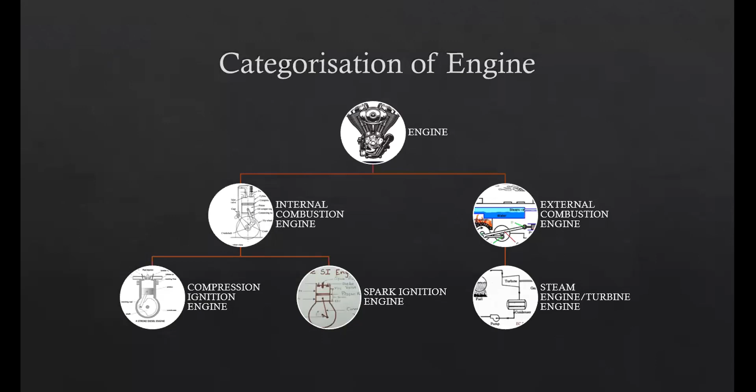Now again you can ask a question - why different fuel, different engine? Can't the same engine run on both fuels? So let us see what is the difference between a CI and SI engine.

The first difference is in a CI engine, no spark plug is available, whereas in an SI engine, spark plug is available. Now see, the name is compression ignition - compression is compressing of the air fuel that is inside, and ignition means in a CI engine the ignition takes place by the compression of the air fuel. So here spark plug is not there.

Whereas in an SI engine, where the name only says spark ignition, that's why a spark plug is available. So that is the major difference between CI and SI - spark plug is there in SI, no spark plug in CI. Second is high compression ratio and low compression ratio.

Now see, in a CI engine the ignition will take place only due to compression. There is no fire that we are putting - only due to compression the ignition will take place. So what happens is we have to increase the compression ratio so that the pressure created on the fuel will be enough. So we have to increase the pressure.

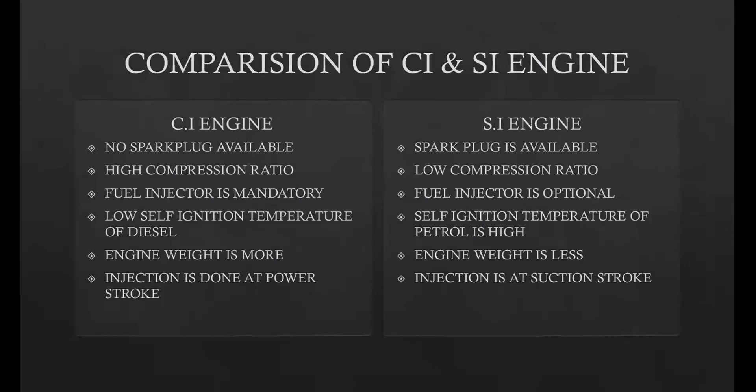So now you are aware why a CI engine is not used in a motorcycle and why a SI engine is used, and what is the difference between a CI engine and SI engine. Now let's take it forward. Here you can see the working of both the engines. To your right, you will see the working of the SI engine, and to your left, the working of the CI engine.

If you observe the CI engine, you will see that at the power stroke, that is after the compression, the diesel is being injected into the cylinder. And if you observe the SI engine, the air fuel mixture enters at suction, and at the power stroke, the spark plug sparks. So that is the difference between the working of your SI and CI engine.

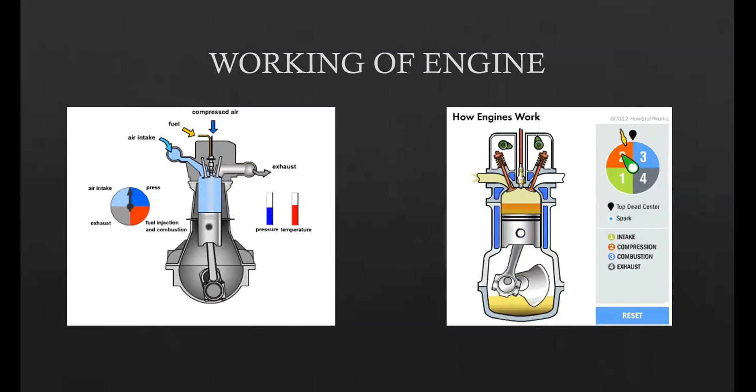Now let us talk about this: SI and CI engines are divided into two types, that is 2-stroke and 4-stroke. Before knowing two-stroke and four-stroke, let us understand what is a stroke.

See, this is a cylinder, and let's assume this is the piston. Now this point of the cylinder is called TDC, that is top dead center. And this point of the cylinder is called BDC, that is bottom dead center. Now understand, a movement of the piston from TDC to BDC is called a stroke. So one movement from TDC to BDC, or from BDC to TDC, will be called one stroke.

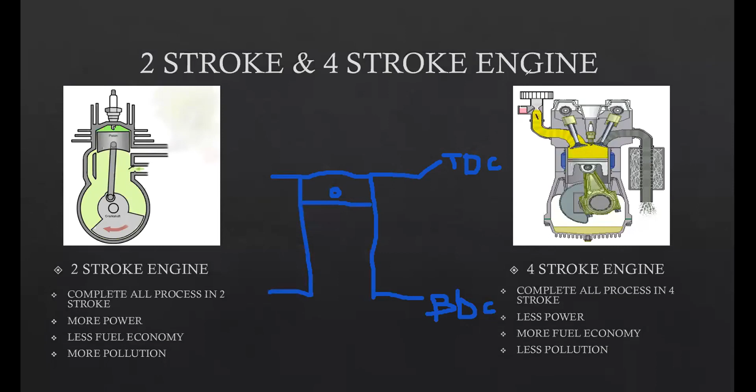So there are four strokes in four processes, that is called a four-stroke engine. Two strokes in four processes is called a two-stroke engine. So that is the difference between a two-stroke engine and a four-stroke engine. The processes, which are suction, compression, power, and exhaust, happen in four strokes of the piston in a four-stroke engine, and the same processes happen in two strokes in a two-stroke engine.

So now let us see more differences between a two-stroke and four-stroke. First, complete all processes in two-stroke versus complete all processes in four-stroke. Second is more power, so let us understand. In a two-stroke engine, the four processes are completed in two strokes of the piston, that is from TDC to BDC, again from BDC to TDC.

So four processes are completed, and in this process the crankshaft rotates 360 degrees. So in a two-stroke engine, the crankshaft rotates 360 degrees. Whereas in a four-stroke engine, for completion of all four processes, the crankshaft rotates twice. So in a four-stroke engine, there is a power stroke at every two rotations of the crankshaft. In a two-stroke engine, there is a power stroke at every single rotation of the crankshaft.

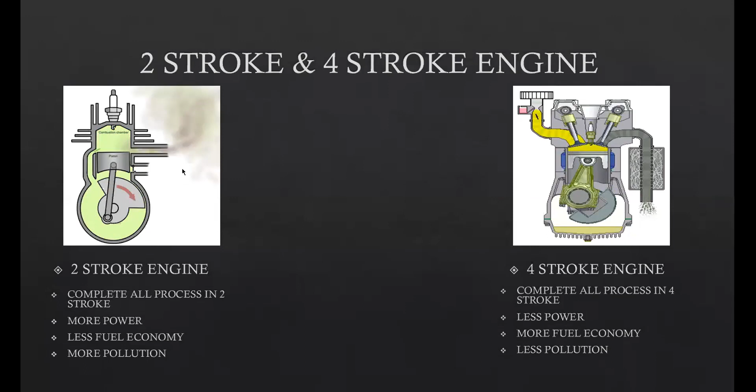Now see this video, it will explain more about two-stroke and four-stroke engines.

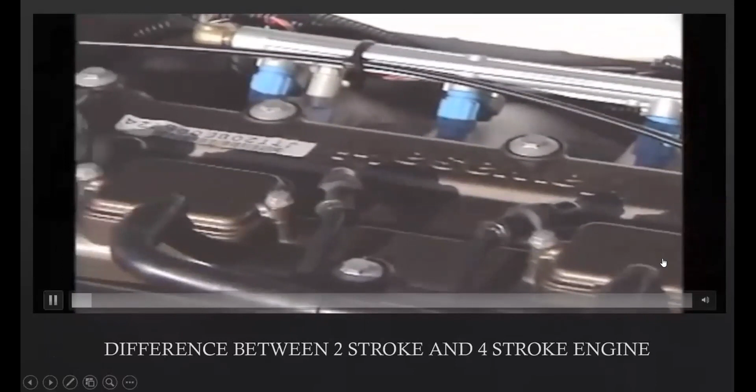There are two types of engines available in PWCs: two-stroke and four-stroke. These names are derived from the number of strokes the piston takes to complete a cycle. For example, a four-stroke engine takes four piston movements to complete its engine cycle.

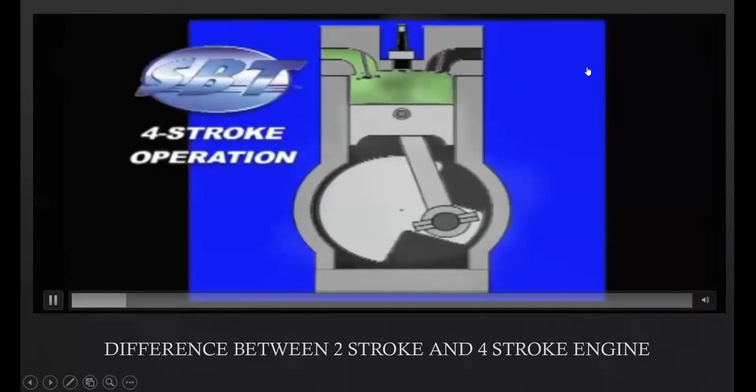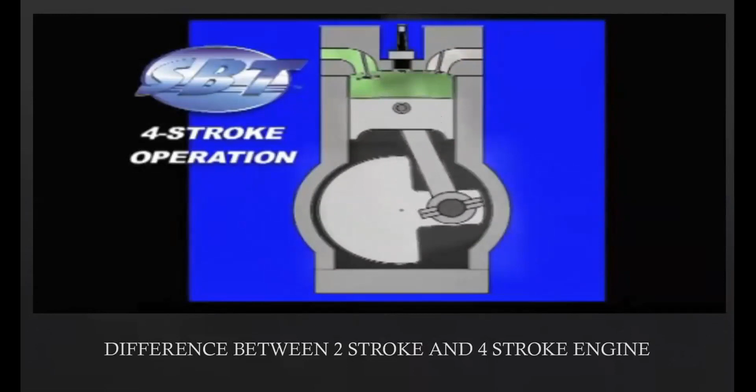The piston lowers for the intake stroke, drawing in the air and fuel mixture, and raises for the compression stroke. The air-fuel mixture is ignited for the power stroke, forcing the piston down, and finally raises for the exhaust stroke, forcing exhaust out of the engine. The cycle then repeats over and over, turning the crankshaft, which is connected to the impeller, which drives the craft forward.

A two-stroke engine is designed to accomplish its complete cycle in just two strokes. During its power stroke, the ignited air-fuel charge forces the piston down until it reaches an opening on the side of the cylinder called the exhaust port. As the piston continues down, it pressurizes the air and fuel mixture under the piston that was drawn into the crankcase during the previous compression stroke.

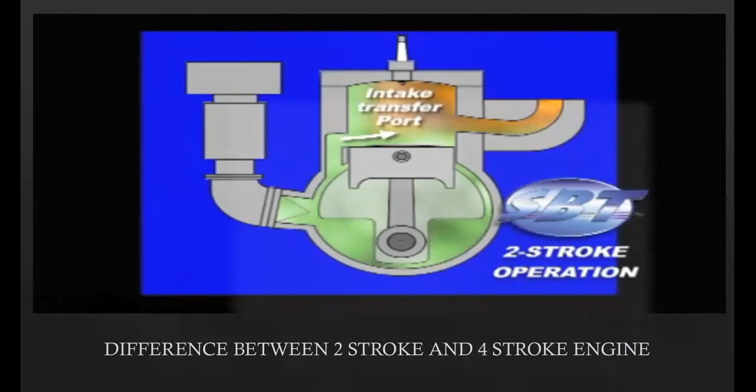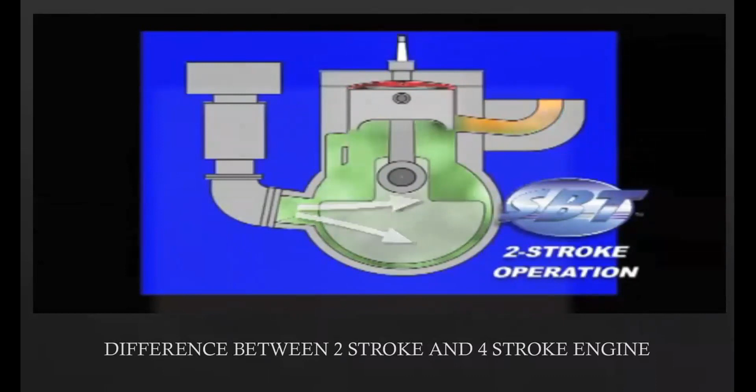An intake transfer port is exposed, allowing the pressurized air and fuel into the cylinder. Finally, as the crankshaft continues to turn, the piston rises, closing off the intake and exhaust ports and compressing the air-fuel charge inside the cylinder. The rising piston also sucks in the next air-fuel charge under it into the crankcase from the carburetors. The compressed charge is ignited by the spark plug, repeating the cycle.

The biggest advantages of two-stroke engines are lightweight design and simplicity in parts. The engine itself weighs significantly less than a four-stroke of equal power output, and there are anywhere from 30 to 50% fewer moving parts in a two-stroke engine compared to a four-stroke. It is also much easier to clear out a two-stroke engine that has been swamped with water.

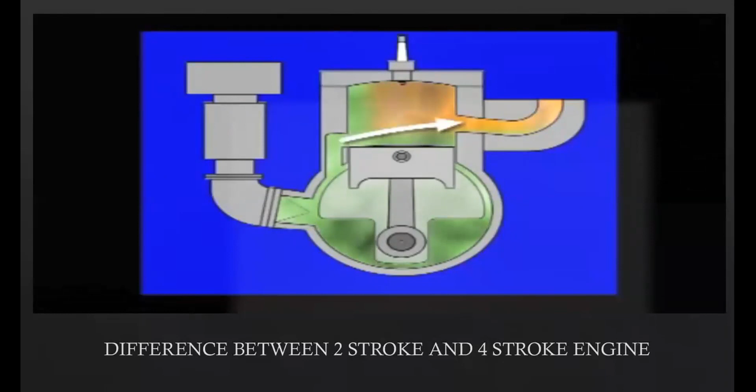The biggest disadvantages are increased fuel consumption and elevated hydrocarbon emissions from its exhaust compared to a four-stroke. Because a two-stroke has its intake and exhaust open at the same time, some of the fresh air-fuel charge passes through the cylinder and out the exhaust port without ever being burned. Because of this and other factors, two-stroke engines have higher unburned hydrocarbon output in their exhaust than comparable four-strokes.

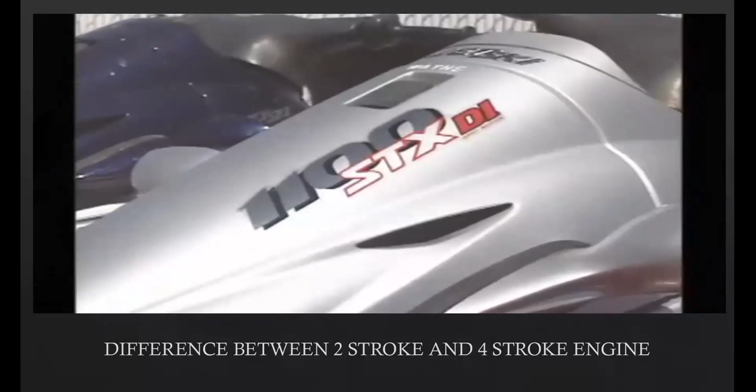There are significant exceptions to this, particularly with engines that use direct injection technology or catalytic converters to obtain low and even ultra-low emissions for their two-stroke watercraft. Late model PWCs in general are significantly cleaner burning and quieter than their predecessors.

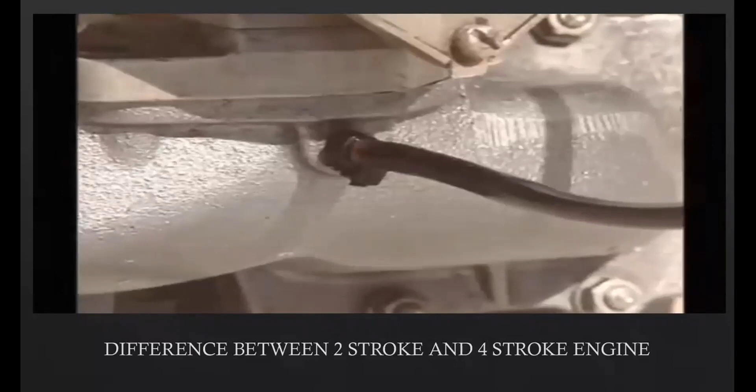The engine oil of a two-stroke engine can be administered by one of two methods. The first method is oil injection, where the oil is drawn from a separate oil reservoir and pumped into the intake tract of the engine in predetermined amounts.

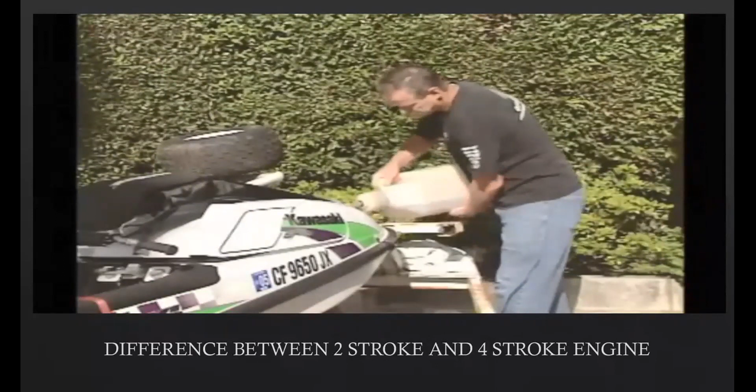The second method is by premix, which is to physically mix the oil into the gasoline before it's poured into the gas tank. The big plus for premix is that it is as reliable as you are, meaning that if you remember to put the oil in the gas in the proper ratio, it will make it into your engine.

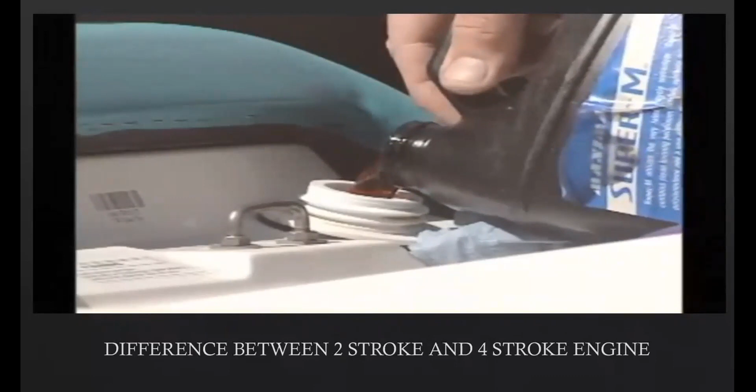The strong point for injection is convenience. Just keep your reservoir topped off with oil, and the system takes it from there. The downside is that oil injection pumps have been known to fail, and when they do, it's without warning, and the results are catastrophic for your engine.

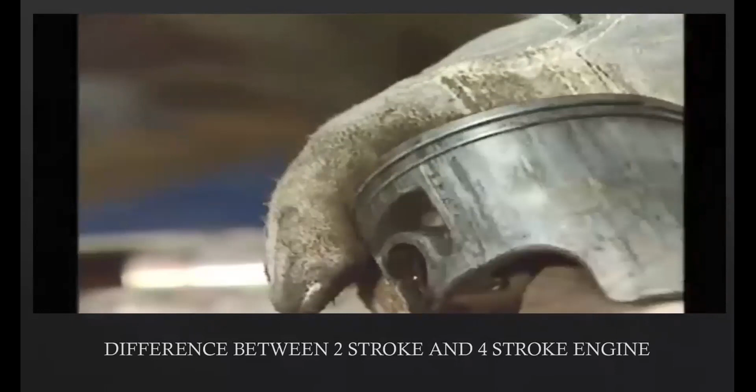It's interesting to note that all of the major manufacturers have committed the lion's share of their attention as of late to four-stroke engines, and for good reason. They are inherently clean burning from an emissions standpoint. They have significantly higher fuel efficiency. There isn't any oil to add to the fuel, so that's one less thing to worry about. And they're quiet, which helps keep the neighbors happy.

There are two notable drawbacks: increased weight by about 50 to 90 pounds, and four strokes are much more involved to get cleared out if internally swamped with water. From an overall performance standpoint in runabouts, four-stroke watercraft can be at least as quick and fast as two strokes, even with their increased weight, due to their superior torque output. There are a few areas in the US where four-stroke PWCs are allowed but two-stroke machines are not, so check with the local authorities of the area.

So that was the difference between a two-stroke and four-stroke engine. I hope now you'll be clear on what the difference is between a two-stroke and four-stroke, and why the systems have now moved to four-stroke.

Because pollution controlling in a two-stroke is very difficult. It is difficult in four-stroke also. That's why year by year, we are changing our norms. That's why BS4, in 2 years BS6, and maybe next year it will be full electric vehicle. Nobody knows. So we cannot say the engine that we are looking at today, that is the IC engine, can be replaced by battery and motors. But we need to understand the present to create the future.

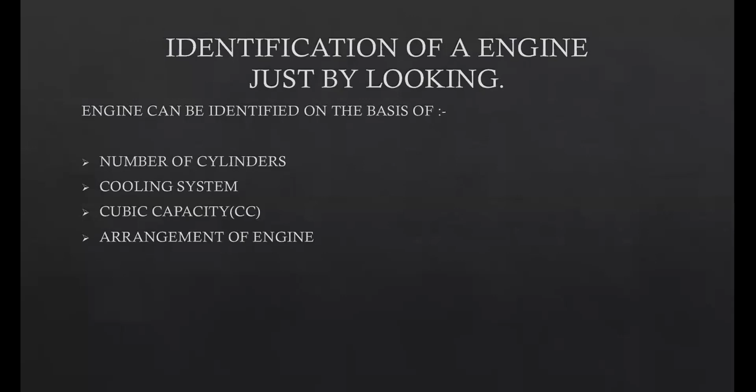So now, an engine can be identified on the basis of number of cylinders, cooling system, cubic capacity, and arrangement of engine. These are the four factors according to which engines are classified. Let us see each classification in detail. First is number of cylinders. According to number of cylinders, engines are classified into three types: single cylinder, dual cylinder, and multi-cylinder.

So an engine can have three types of cylinder arrangement. A single cylinder will have a single exhaust, a dual cylinder will have a dual exhaust, and a multi-cylinder will have multiple exhaust. The arrangement is either in parallel, inline, or in V. So this dual cylinder and multi-cylinder can be arranged either in parallel, inline, or in V. So according to number of cylinder, an engine can be of three types: single cylinder, dual cylinder, and multi-cylinder.

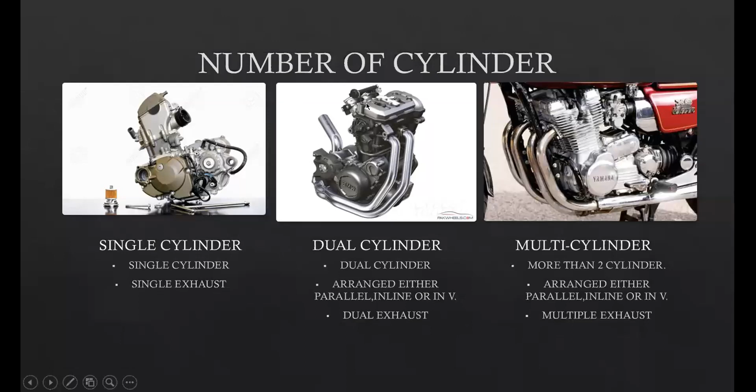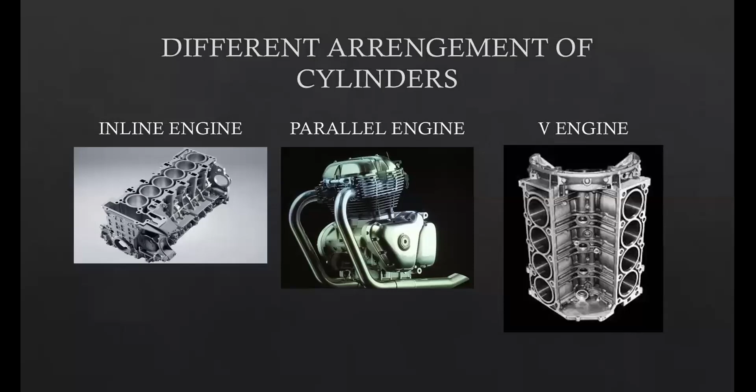As I told you, the different arrangements of the cylinders can be inline, parallel, and V. A V engine you will easily recognize: if you see two cylinders at an angle to each other, intersecting at an angle, that is a V engine, making a V shape. Now, how will you understand which is an inline engine and which is a parallel engine? How will you differentiate between an inline and a parallel engine? Let us understand this inline engine and parallel engine.

Basically, in the parallel engine, the cylinder arrangement is synchronously arranged. That means if one cylinder is at TDC, the other one will also be at TDC. If it comes to BDC, the other one will also come to BDC. That means it moves in the same way.

In an inline twin, if one cylinder is at TDC, the other will be at BDC, so they move opposite to each other. That's the difference between parallel and inline. A parallel twin is when both cylinders move in a synchronous manner, while an inline twin means both cylinders move opposite to each other. Now let us see more about it.

In a parallel twin, there is more vibration because there is nothing to cancel it down, since both cylinders create power at the same time. So damping of vibration is much needed. Whereas in an inline twin, both cylinders are moving opposite to each other, so they cancel each other's vibration. This means less vibration is created in an inline twin.

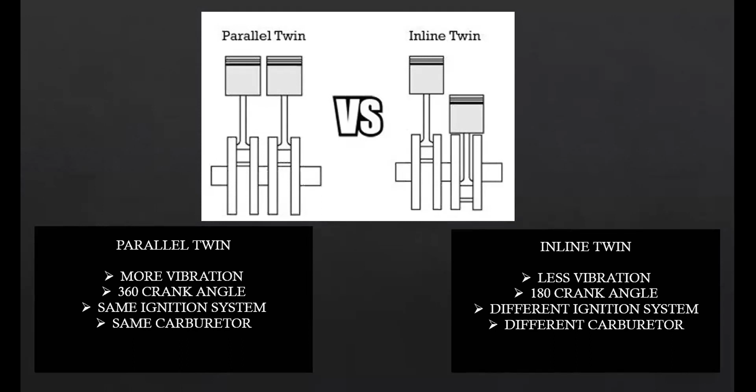So to identify from outside whether an engine is a parallel twin or inline twin, check whether it has two carburetors or injectors, or just one. If there are two carburetors or two injectors, it can be an inline twin. If there is the same single carburetor for both cylinders, it can be a parallel twin.

Now let us talk about another important factor of the engine, the cooling system. Inside the engine, something is burning - air fuel is ignited, and through that ignition we get power. So that system needs to be cooled continuously so that the efficiency of the engine can be maintained. The more efficient the cooling system is, the more efficient the engine will be.

There are two major types of cooling systems used in two-wheelers: air cooled engine and liquid cooled engine. In an air cooled engine, you see fins outside - this fin or rib-like structure increases the surface area of the engine. When the surface area increases, it easily dissipates heat to the surrounding, and it also traps air in between the ribs, which helps cool the system. So fins are installed in air-cooled engines to increase surface area so heat can be dissipated easily and air can be trapped in between.

So in an air-cooled engine, you will always find fins or ribs outside the engine. But in a liquid-cooled engine, it's not like that - it is fully plain, with no fins or ribs. In a liquid-cooled engine, there is a chamber inside the engine where some liquid is present - that is coolant, a mixture of water and antifreeze. Antifreeze is ethylene glycol or propylene glycol, and a 50-50 composition of water and antifreeze makes your coolant.

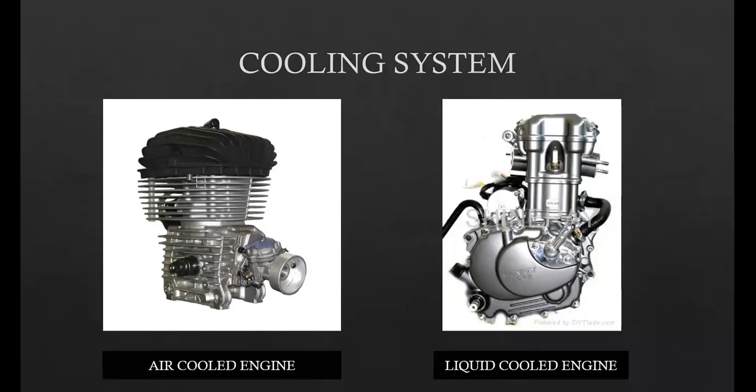Now another major thing that comes up when we buy an engine or vehicle is CC - 150cc, 250cc, 1000cc, 1800cc, 1500cc, 1200cc, 125cc. What is this CC? Centimeter cube? Cubic centimeter? No, it is cubic capacity. So when we call it CC in engine terms, it is cubic capacity.

CC is the capacity of the cylinder - it is the volume of the cylinder. It is the measure of the air-fuel mixture that can be stored in the cylinder. So that is what CC is, the volume of the cylinder. CC is directly proportional to power - if we increase the CC of the engine, the power will increase.

So the cc is directly proportional to power. A 250 cc engine will be more powerful than a 150 cc. But if both engines, two vehicles, are 150 cc, then both would be equally powerful.

But difference in power is there. If you observe FZ 150 and R15, both are 150 cc. So why is the power of R15 more than FZ? If cc is same, then power should be same. Why is power more? If cc is same, we go to other factors. What are the factors? Cooling system.

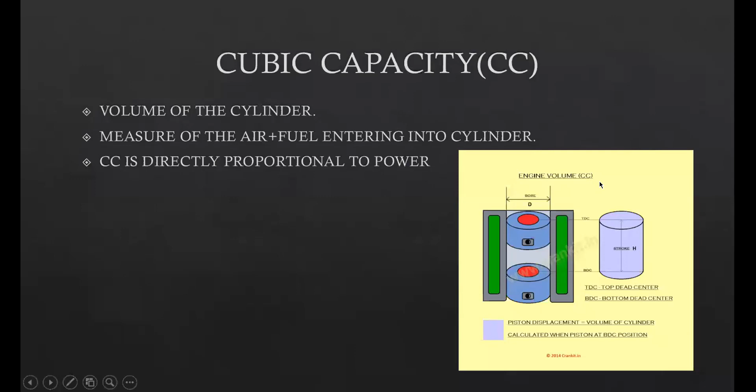So cubic capacity, that is cc - if cc increases, the power of the vehicle increases. Now last is arrangement of engine - how the engines are arranged in your vehicle.

If you see, there are 3 types: horizontal, inclined forward, inclined backward. Horizontal engines are small engines - 100 cc, 110 cc, 125 cc - they can be easily laid down in the vehicle, and the manufacturing cost of this engine is very less. That's why horizontal engines are used in the smaller engine segment, that is 100 cc and 110 cc.

Inclined forward engine - most of the vehicles you see have this, inclined forward engine. This has become the standard phenomena. Every vehicle you will see has an inclined forward engine.

Inclined backward engine, this is rare. You will see very few vehicles with reverse inclined or inclined backward engine. This type of engine is used in vehicles where we want to alter the CG of the vehicle, keeping the wheelbase same. So that is where we use the inclined backward or reverse inclined engine.

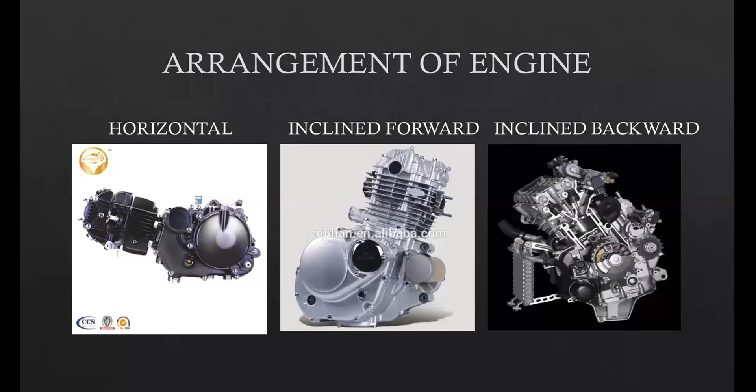So these were different parameters, different prospects about the engine. Now let us identify it. I will unmute one by one person - raise your hand who will speak.